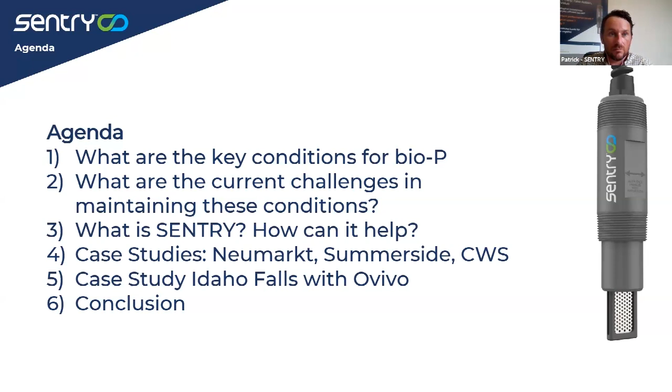We then have 4 case studies. The first 3 we'll go through reasonably fast. Case studies from Germany, Canada, and the US. And then we'll hand it over to Sergio to talk in more detail related to Idaho Falls and their work with Sentry, assessing this tool as a new lens for the EBPR process. Okay, so with that in mind, Juliana, will you take us away? And let's just start with that intro to bio-P and let's discuss the challenges associated with EBPR in general.

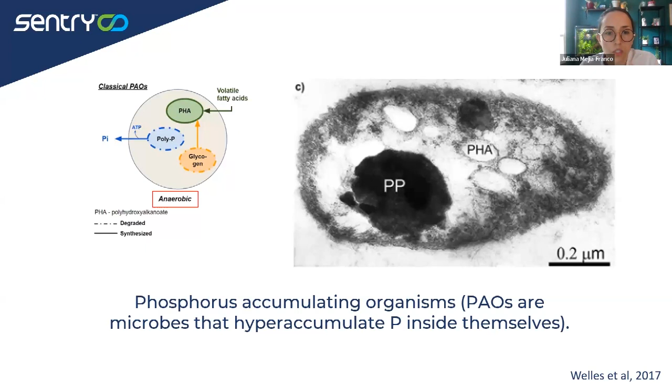So how does that PHA get to that cell? That fuel? Well, under anaerobic conditions, the PAOs uptake short-chain molecules of carbon or volatile fatty acids and convert them into PHA. So that cannot be done for free. They need to use some glycogen as a store that is in the cell, and also release some phosphorus, like some poly-P, as a source of energy. So this starts being a bit counterintuitive because for this process to work, you need first to release some phosphorus, create this fuel as PHA, and then be able to uptake the phosphorus. Okay, so the next one.

Okay, so this all makes sense because in aerobic conditions, the process is reversed. So instead of releasing phosphorus, now the cell uptakes it and accumulates it in excess, leading to this net removal of phosphorus that we all want. So in short, we want three main conditions for the EBPR or enhanced biological phosphorus removal process to work. We need first that anaerobic condition without any other electron acceptors, such as oxygen or nitrate, just very, very anaerobic. Then you need also a VFA concentration that enables this fuel, let's say, build up. And then the switch from anaerobic to aerobic so that the cell can start uptaking that excess phosphorus and remove it from the solution, okay?

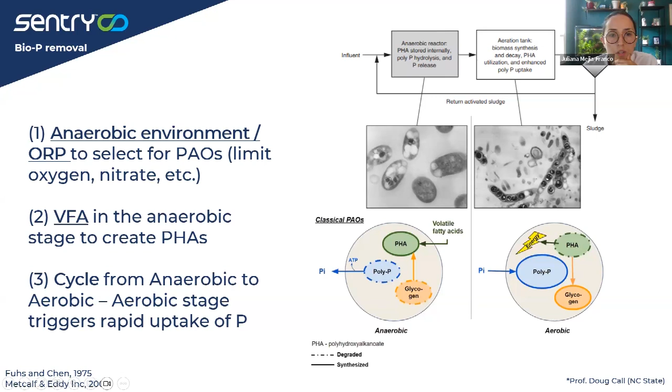So I think that that was a very high-level explanation of how EBPR works. Let's see what are the challenges for this process. So we might have some control over how aerobic or anaerobic an environment is. That's a good job for engineers and operators.

But we don't have that much control over how much VFA enters a plant or how readily biodegradable that carbon is in the plant. So we know that wastewater is very unstable. We certainly know that the nature of that carbon is always changing. So this composition of wastewater usually shows a diurnal pattern that's already very dynamic.

Now consider adding extra variability to that dynamism by having some rain infiltration or, let's say, industrial contribution from the collection system. And that's only for composition. Now, how available that carbon is for the biomass in a plant also can change from environmental factors such as seasonal temperature changes or the presence of inhibitory compounds. And without that information, there is really little you can do for EBPR.

So here I'm showing in this graph an example of biological information that we can provide that tells you how much carbon is actually available for biomass. You'll see rbCOD as how we report it, readily biodegradable chemical oxygen demand, and that's the profile of available carbon in a plant in Germany.

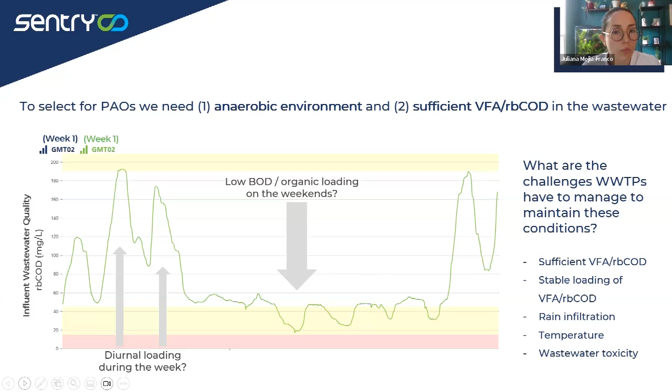So you'll see that there is a diurnal profile, very clear, but then during the weekends, that profile kind of distorts, and that's exactly when the plant starts reporting issues at their effluent, so some phosphorus exceedances. So the message here is basically that if we know the right information in time, we have better control on EBPR, okay?

So, well, I'm not saying that plants cannot measure carbon. I mean, plants have many different ways to measure carbon, like COD, BOD, TOC. But the challenge here is that these metrics are chemical and they don't usually give a complete picture of what fraction of that carbon that is in the water is actually useful for the EBPR process.

So as I mentioned, operators can use these chemical metrics like COD, BOD, TOC, VFA to quantify the concentration of organic matter, but those metrics won't consider factors like changes in temperature or presence of inhibitory compounds, or even how readily biodegradable the carbon is, which at the end will affect the availability of that carbon to the biomass or to the PAOs. So in contrast, we have biological sensors, this biological option to monitor the carbon that will give you the information and fill that gap in this process, okay?

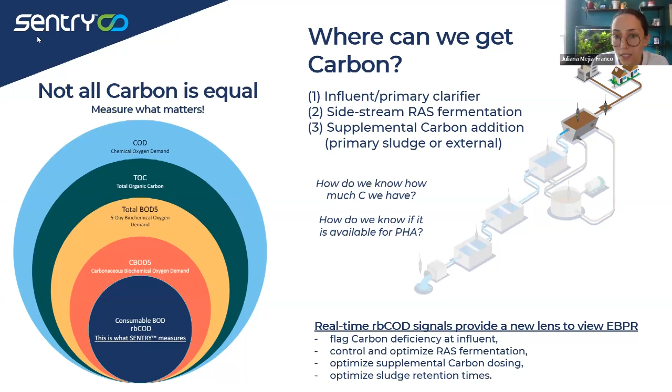So this new lens, this new biological insight on carbon availability for EBPR, is what operators lack to have better control of their process. Because they really know where the sources of carbon are, like specifically for VFA. If the influent doesn't come with enough VFA for EBPR, they can resort to RAS or primary sludge fermentation to get some VFA. And if that's still insufficient, they can also dose some supplemental carbon. So they can play with what they have, but the key is to have the right information at the right time to enable these optimization strategies.

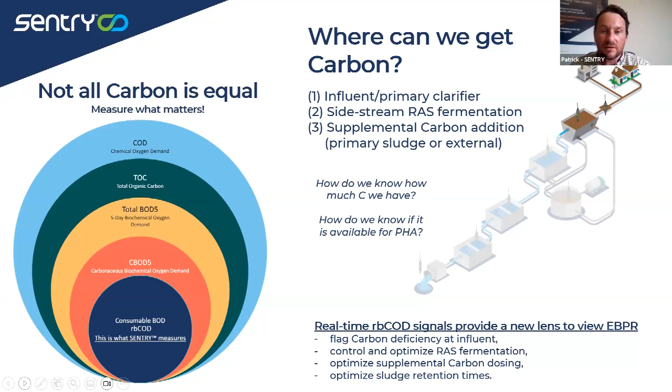Okay. Yeah. Thank you. Okay, so we've summarized at a high level what is BioP, EBPR, what are the conditions from a biological perspective that we want to maintain to select for those PAOs in an anaerobic selector environment, and that potentially if we had data or a signal that could tell us exactly that food, that available component, we could use this to better understand carbon management and better maintain those conditions for reliable EBPR.

So next, what we'll do is we'll just really quickly touch base on the Sentry sensor and how that works to try and link the two together.

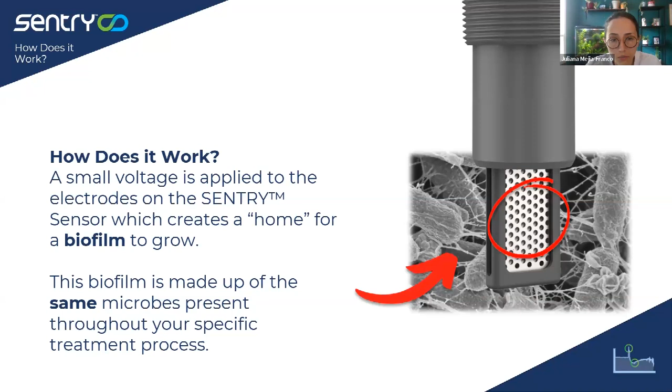So I bet most of you must be wondering, how is this even possible using bacteria? So a more technical explanation is here. The sensor has an electrode. You'll see the two plates of an electrode, anode and cathode there. And we grow that biofilm in the anode side of it. We also apply a voltage in the circuit so that as the biofilm degrades carbon biologically, all the resulting electrons from that redox reaction are respired to the electrode and not to other electron acceptors.

So oxygen or nitrate is not involved here. Everything is going to the anode. And this flow of electrons, which in physics we describe as current, is what we measure. So we measure this current. And this current metric is directly proportional to the amount of food, or readily biodegradable carbon, that is available to the biomass in the system.

So in other words, what we're measuring is basically the ability of the biology to process or to treat the wastewater, or in layman terms, we like to say that this is a heart rate monitor for the biology. And this measurement is translated into a minute-by-minute data set that represents the amount of organic material that bacteria in a system can consume. So we report this as consumable BOD or consumable rbCOD or VFA, depending on where the sensor is installed.

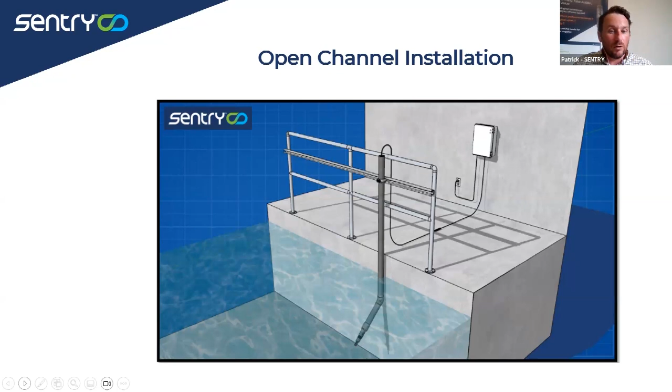Okay, so for today, Juliana, do you want to take it away? So we're going to do Summerside, Clean Water Services, and Neumarkt in Germany. Love it. Awesome. Yeah, thanks.

So the first one is Summerside in our home province, Prince Edward Island in Canada. That's the paradise for lobster lovers, if you don't know what PEI is. So this is a mid-sized municipality, and they treat municipal wastewater, but also some dairy industry effluent.

And they came to us because they were having issues sometimes with phosphorus and nitrate breakthroughs. So they were thinking that it could have been some toxicity issues in their influent. They just needed to know some more information about their, say, carbon profile. And we installed sensors in their influent after screening.

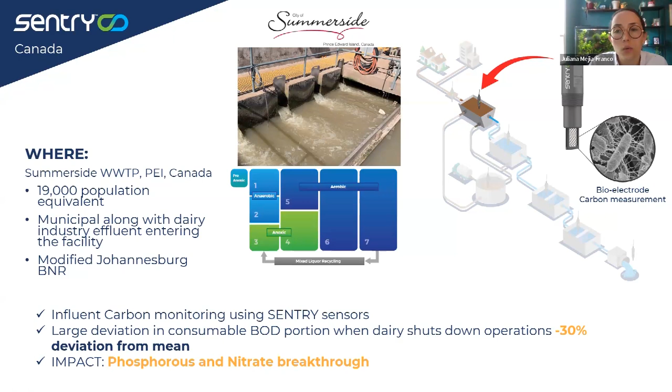So it was not a toxicity issue, but more like a nutrient, carbon deficiency issue in there. And with this information, they were able to first have some more conversations with the industry in the city and plan this better so that the exceedances were not happening that often.

Love it. And I'd say, Juliana, this was the first time, this was maybe 4 years ago, that we began to understand there are those certain thresholds, even at the influent, that if we can just keep the signal above those thresholds, your BNR process is fine. But as soon as that signal goes below those thresholds, you do tend to have problems.

Okay, number 2. Yeah, so number 2 is very similar. It's in Germany, in the Bavaria region, and a very similar size treatment plant, also treating municipal wastewater and also treating some industrial contribution, but now from the brewery industry and also some hospitals. They came to us again with a similar issue. We're having some phosphorus breakthrough, and we don't know exactly what that is. It could be toxicity, it could be something else.

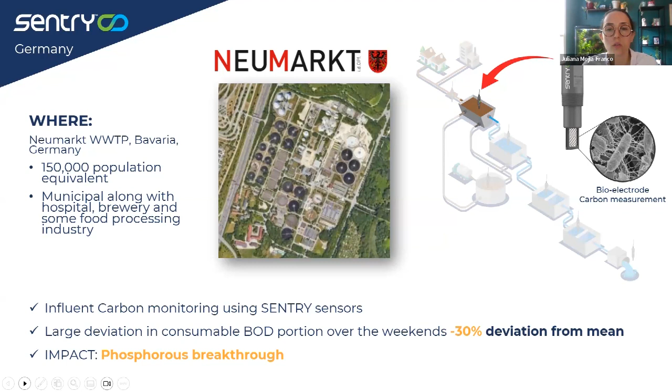So we went and had this next step on, hey, could you do something with this information? Could you start adding some supplemental carbon to this process during these moments and see what happens? So the next week, they added some glycerin. There is a dose there. And they saw that it really aided the phosphorus removal process. They didn't have the exceedance issue. And that was basically a validation on how the Sentry signal was not just to collect information and understand the profile, but also was actionable, okay?

Yeah, I love that because that brings us right back to the start. You're measuring what matters. We know there's enough carbon, whether it's from the influent or whether we need to get some from a RAS stream, fermented RAS, or the third option then is that supplemental carbon. And it's, can we just maintain these carbon thresholds using one of those three, keep it above a certain low threshold? And if we can, we know we'll be okay for our BNR or our EBPR.

Okay, so number 3, slightly different. Yeah, number 3 is slightly different, as Pat says. So we were working with Clean Water Services, the plant in Tigard, Oregon. This is a much larger facility, and they also treat municipal wastewater. But their issue is that they have very stringent seasonal nutrient limits. Specifically for total phosphorus, they have 0.1 milligrams per liter, which is very restrictive. So they were piloting different processes, RAS fermentation processes, and testing sizes in their aeration basins.

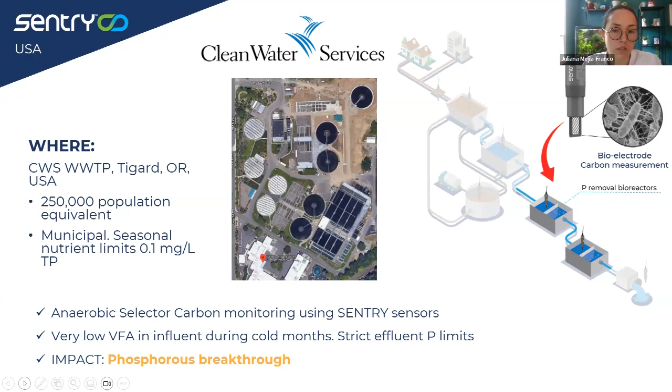So we installed sensors, not for this specific purpose, in their anaerobic selector basins. And we had 2 trains to monitor. One was a larger train, larger anaerobic basin, the other one was smaller. In the larger one, they were also testing RAS fermentation. So the idea here was to understand what was the profile of VFA in that RAS fermentation and have some comparison between the 2 basins, understand if there was any relationship with phosphorus as well.

We were installed right next to orthophosphate analyzers as well. So that enabled us to do a correlation with that metric, orthophosphate concentration. And we found in both basins, the larger and the smaller one, that the correlation between the Sentry signal, which is readily biodegradable organic carbon, or VFA, was very, very close to orthophosphate. And all that makes sense.

I mean, if you have higher phosphorus, which is higher orthophosphate release, it means that you had higher VFA availability in the water. So that was basically the validation on how we could interpret this signal in anaerobic basins. And this helped us also understand that this could be a better location for this kind of monitoring.

So this could be analogous to orthophosphate. Orthophosphate sensors are very, let's say, complicated to use and time demanding and costly as well. So if we could have this other option, it would be better. So with this in mind, we basically decided to go forward with another project now in Idaho Falls.

So, Pat, could you go next? In Idaho Falls, now having learned all that, where to have the sensors, how to interpret the signal, we wanted to basically understand if that relationship with orthophosphate and VFA was still consistent in this plant, and have better information for integration into a new process. So I'll let Sergio elaborate on this.

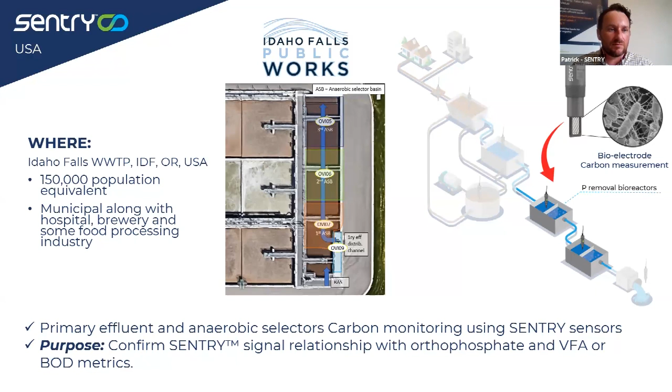Perfect transition. Okay, so thank you very much, Juliana. So we've been through basically 3 case studies on our side, and then that led us up to this work with Sergio. So Sergio, let me lead it to you. You take it away, and let's go for it. Idaho Falls.

All right. Thank you, Patrick, and good day to everybody. It's a pleasure to be here. Patrick invited me to co-present and share a little bit about our experience with the Sentry probe at Idaho Falls. You can see my contact information. I've been doing biological treatment for 23 years.

Bugs is one of my passions. The second one is percussion. You can see I play during WEFTEC for Jamming for Water with other water professionals, which has been a great enjoyment for me.

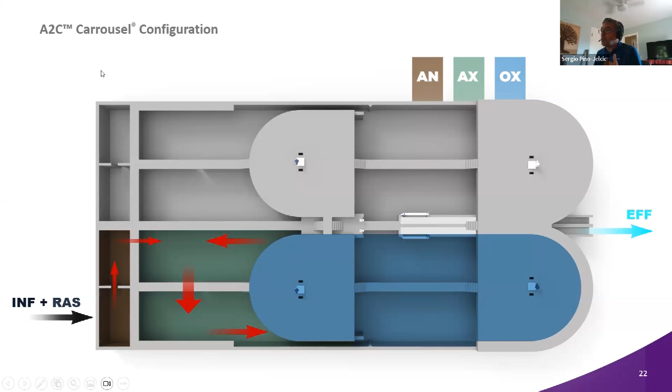And our main goal with this new configuration is two things. Number one, maximize the availability of soluble carbon upfront and make sure that it's utilized upfront. We want to avoid bleeding soluble carbon into the aeration basin. And the new concept is carbon management, looking at all the sources that we have upfront that we can tap into to generate this soluble carbon and, most importantly, VFAs, to grow PAOs. Next slide, please. So with that in mind, we introduce what we call Carrousel Selector. It is, again, an upgraded version of the well-established three-stage Carrousel system with primary focus on carbon.

Next slide, please. So why carbon? Number one, we all know carbon is the engine for BNR treatment, right? BioP and denitrification heavily rely on that soluble biodegradable carbon. As Juliana just said, BioP is more specific. We need to produce VFAs for PAOs to do the cycle and the wonderful thing that they do with BioP.

The second fundamental element here that we introduce with Carrousel Selector with carbon management is understanding that carbon is a driving force for good settling sludge. So in our new development, we want to create a feast phase. All you can eat, all you can store in this case. We want to promote the growth of carbon storing bacteria. PAOs is one of them, right? And we know that if we have enough population of PAOs in the total mixed liquor, we will gradually start changing the morphology of that mixed liquor towards a densified mixed liquor with some insight of aerobic granular sludge.

So we have seen plants, when you have enough of this carbon storing bacteria, you start seeing maybe 50% of the mixed liquor composed of particle size between 200 and 400 microns. So the small granules really can help you with more robust BNR treatment and having a good secondary clarified effluent and potentially even more capacity as you improve that settling, right?

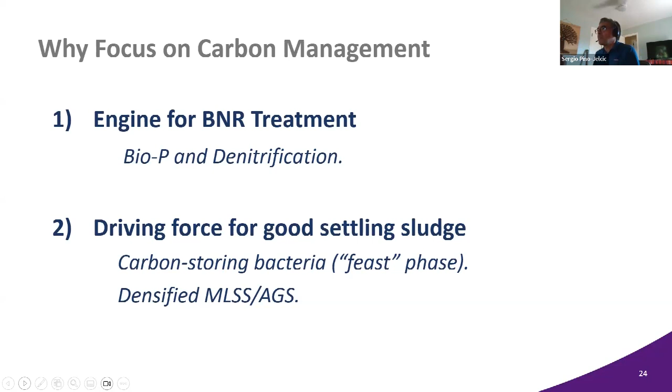Next, please. So going back to Sentry, why is this important for us? For us, it became a new lens to see carbon. All this is about carbon with this development. The standard practice today in the treatment plant is to run the biochemical oxygen demand test to understand your organic load. That's the BOD5. There is a 5 there because it takes 5 days to cultivate this in the lab.

So you take your sample, a BOD sample on Monday, most likely you will get the result a week after that. How do you use that number? Only for reporting purposes. You have nothing to do with the operation of the plant or improvement of performance because it's a week late already.

With this, the intent with the Sentry probe is to have real-time monitoring of that soluble carbon coming in to understand the dynamics, the diurnal profile, and from there, that visibility allows us to implement operating strategies with some tools that we have implemented in Carrousel selector.

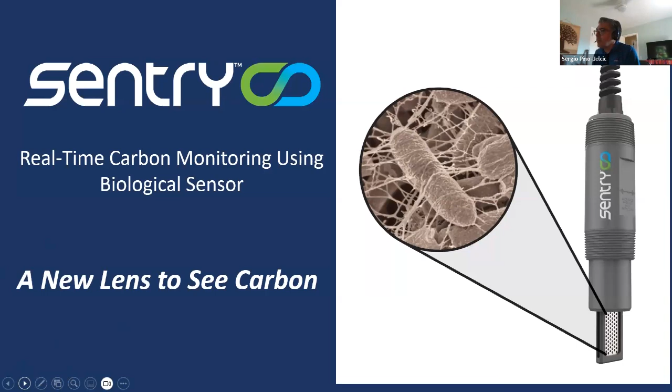The second element that was important for us about Sentry: it is a very simple probe. Simplicity is fundamental for Carrousel. Our clients love the simplicity. I can tell you that there is no need to calibrate this probe. There is no need to change membranes or light, anything. The only thing that we learned is that maybe once a month, every other month, you pull up the probe from the basin and just clean that excess biofilm a bit, right? Very simple, perfect marriage with Carrousel.

Next, please. So we have been working with this treatment plant, Idaho Falls, rated for 18 MGD. They have very interesting elements. We have been doing research with them for the last 3 years. And for this particular trial with Sentry, we want to correlate the Sentry signal in the influent of the bioreactor with other carbon metrics like BOD or the flocculated filtered COD, the truly soluble carbon.

So as you can see in this image, we put the first probe in the primary effluent. So there is a primary clarifier. So most of the BOD getting into the first cells of the bioreactor is soluble BOD. We put a probe there, but then we decided, let's put more probes through these anaerobic selectors that they have in series to see what that gradient looks like. But today I want to focus strictly on that primary effluent: Sentry signal versus BOD and FFCOD.

The plant is very simple. You have those anaerobic selectors, great performance in BNR, PAOs, live population. They even have small granules. After those 3 anaerobic selectors, they go through a channel, as you can see here, and then split the flow between 3 trains in parallel, starting with swing zones, diffused aeration, clarifiers, filtration.

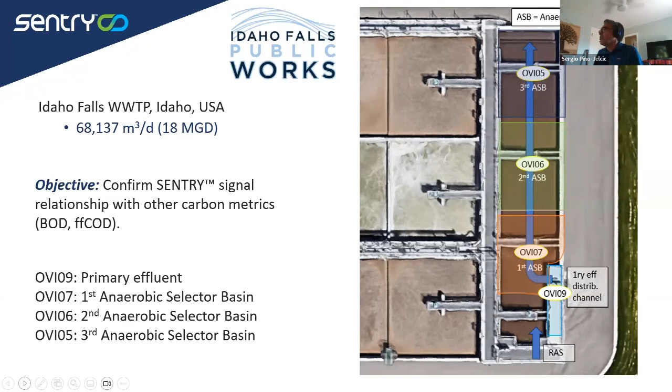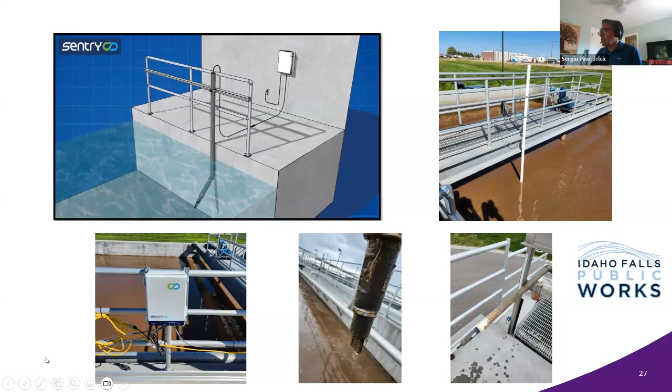Next, please. In terms of the installation, very easy for us. Between one person from Ovivo and one person from Sentry, it took less than a morning to install 4 probes, 2 panels, and all the electrical, conduit and things like that, plus the safety elements. So from that perspective, super simple to install. Cleaning, very simple: once a month, every other month, you pull it out, clean the biofilm a little bit, and you're good. Next, please.

All right, first set of data. So this is data from the end of October through mid-March, so about 5 months. In orange, you can see the daily composite BOD that the plant does in-house. And in blue, you can see the Sentry signal. That is the daily average of all the data points that we take per day. This probe takes a signal every minute. So each blue dot is the average of more than 1,000 data points.

As you can see here, this was the main aha moment for us. There is a strong correlation between the Sentry signal and the composite BOD from the plant. We were not intending to measure BOD per se, but the key for us is to understand those dynamics in real time. Remember, BOD takes 5 days. This is real time.

One lesson learned I would like to share is that if you want to correlate the signal to an actual BOD measurement, BOD5 is done at the lab at 20 degrees C. Well, guess what? The influent to the bioreactor is not at 20 degrees C. So we learned that we had to do a temperature correction to normalize it to 20 degrees C. I have to give credit to the Sentry people for helping us with that. And I'm very happy that they're working on a new development to introduce the temperature signal into the probe and do the temperature correction behind the scenes.

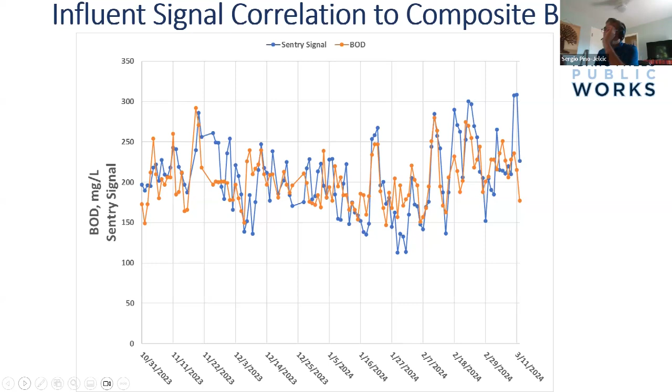But again, for us, that was an aha moment to say, this really is an accurate visibility of the carbon coming in to this plant. Next slide, please. We went ahead and did some flocculated filtered COD in a lab. We had to pay a little bit extra, plus the BOD and the Sentry signal. As you can see, again, great correlation between those 3 data sets. Absolutely, that's exactly what we're looking for.

Have that visibility and make sure that the Sentry signal is accurately, right, following the dynamics of the soluble carbon coming into the plant. Next slide here, please.

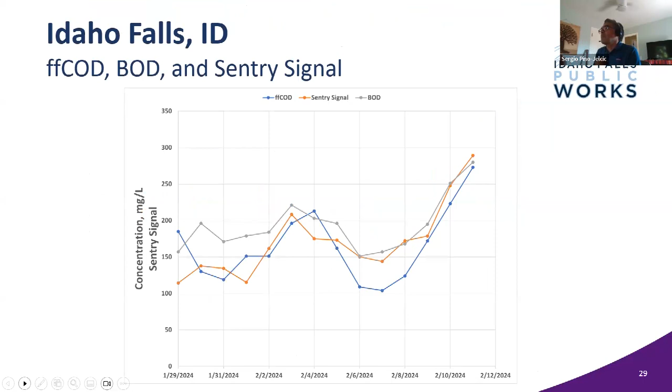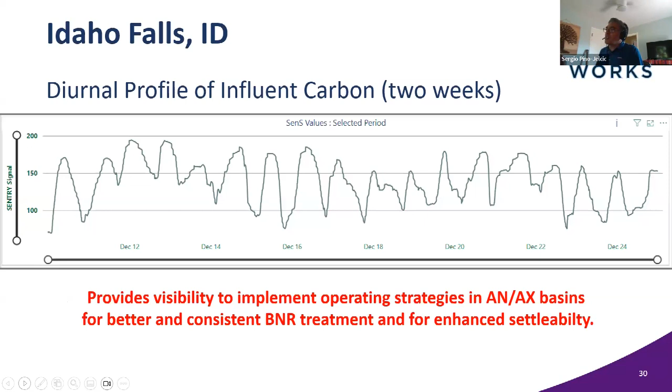And with that visibility now, I can implement certain strategies with new tools that we have implemented in Carbon Soil selector in those anaerobic and anoxic basins to do the things I mentioned before. Drive better, more consistent BNR treatment, and try to drive this carbon storing bacteria population in the system to enhance settleability. Next, please.

So applications of the Sentry probe in Carbon Soil selector. This is how we see the landscape moving forward, being incorporated in the selector. Number 1, we can optimize the food to microorganism ratio in the first anaerobic cell. To drive this carbon storing bacteria, we want to avoid diluting the carbon coming in.

So if I have the carbon signal from Sentry, it's going up, I can send more RAS to that first anaerobic cell. If the carbon signal is coming down, I can send less RAS to that first anaerobic cell and maybe bypass some of the RAS, right? The key is that in the first anaerobic cell, I want to maintain a high, sustained F/M ratio.

Number 2, in terms of applications, I can optimize the internal recycle flow, nitrate. So more nitrates I can send up front if I have more carbon. So the carbon goes up, the carbon signal, I can bring more nitrate.

With Carrousel, we had the benefit that we don't need pumps. We just use a gate and take advantage of the hard circulation pattern, right, the racetrack, and we can bring as much nitrate as we want, depending on the carbon signal. So a strong correlation between carbon signal and our ability to denitrify in this case.

Next, please. The third element, this is a pretty cool one, I like it, is implementation of a fermentation cycle within the anaerobic and anoxic basins. We have a very innovative way to do that. And with fermentation, again, carbon management, we're looking at where we can tap into to produce these volatile fatty acids, right?

And with fermentation, we can tap into the complex organics, the slowly biodegradable carbon, going through hydrolysis, fermentation, and increase that VFA quantity for PAOs. To do that, we now know the carbon profile and we can optimize the fermentation cycle. And in terms of this carbon storing bacteria, we can maximize the feast phase, right? All you can store, all you can eat pretty much, buffet for PAOs up front, right?